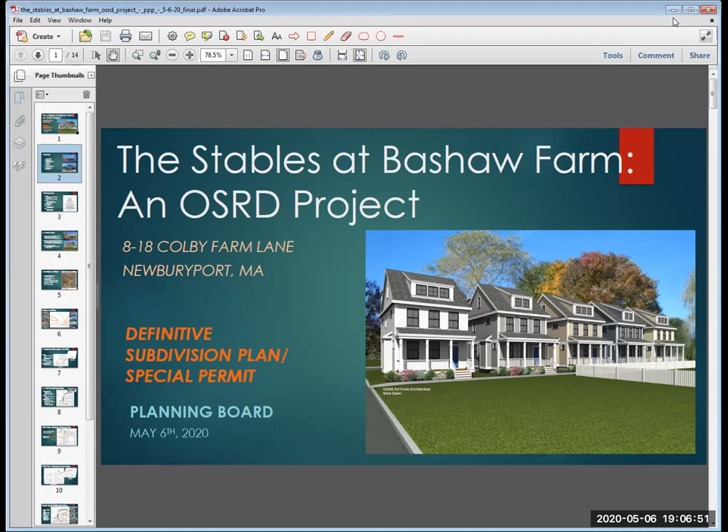So what we're going to do tonight is, I've just introduced the design team. I'm going to go over the project goals, our existing conditions, some of which you can see on the slide, our yield plan, the OSRD plan, the building elevations, and take questions and comments.

I might add that we had a very successful and in-depth technical review meeting with just about every involved city department a few weeks ago, which was really helpful. We've since met, figuratively speaking, with some other city department heads, namely Lise Reed, and we're working on meeting with the DPW, which has been a task given all the conditions. In addition, last night we had our first meeting with the Conservation Commission, which will lead to one of the comments we have later on. We pretty much closed everything out with them except for one remaining issue we'll talk about. So we're pretty excited, we've done a lot on the project.

So we can skip over this again, I've already talked about the design team.

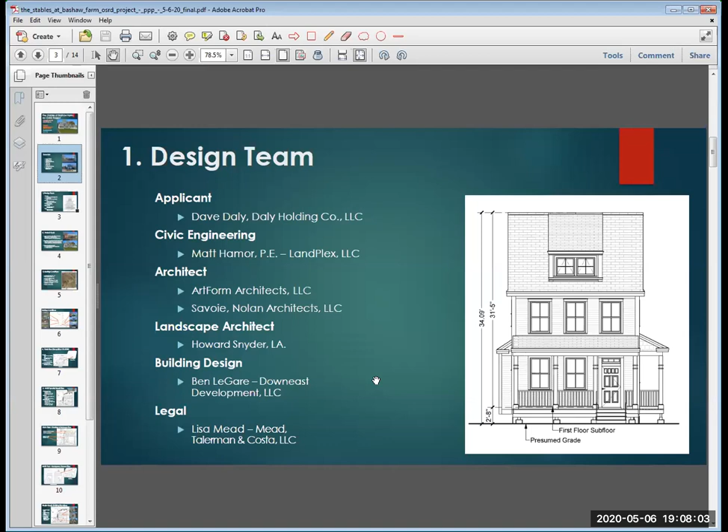The project goals are to support the revitalization of Colby Farm Lane. As you know, there's the Reserve at Bashaw Farm across the street, which is coming along nicely, with a number of units under agreement and it's really starting to be cleaned up. A lot of work has already been done at the end of Colby Farm Lane at Low Street to help with sight lines in either direction. Now we're trying to work on this side of Colby Farm Lane, which we refer to as Colby Farm Lane 2, which currently houses a number of industrial uses, truck storage, and other barns, not really conforming with the residential uses of the underlying district.

We also want to expand public open space in the northern pasture, preserving over 80% of the land in the project for protected open space, and provide some public parking and a neighborhood pocket park. And then expand housing opportunities. These are 8 modest-sized single-family homes and townhouse units, and one of the duplex units will be an affordable housing unit, which actually has a bedroom on the first floor, which the Affordable Housing Trust is pretty excited about.

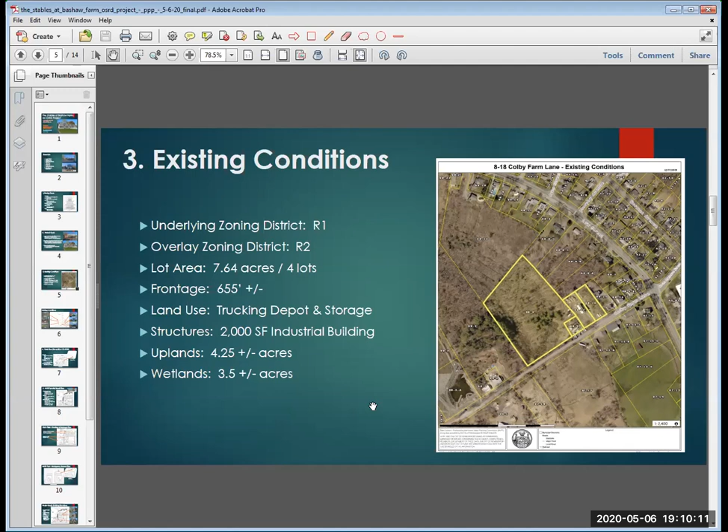So the underlying district is an R1 district. It has an overlay zoning district, the R2 dimensional and use requirements, which is how we get the 2-family use in there. The lot area in total is 7.64 acres; 80%, more than 80% of that, is 6.11 acres, and we're preserving that, which will end up being in that larger area we'll delineate further. There's 655 feet of frontage, including 4 lots in total. The current land use is a truck depot and storage area with a 2,000 square foot industrial building. There's 4.25 acres of uplands and 3.5 acres of wetlands.

Under these existing conditions, we have a lot of really great conservation and natural resource areas, wet meadows, uplands, and wetlands all in that back pasture. You might recall when we first met with the board, there was a proposed trail and bridge over that initial wetlands coming in off the proposed development lot. The Conservation Commission does not want that to happen; they don't want people trampling through the wetlands in the back and would prefer to leave it as open conservation land. The other existing condition is the truck depot and the storage of trucks all around the site.

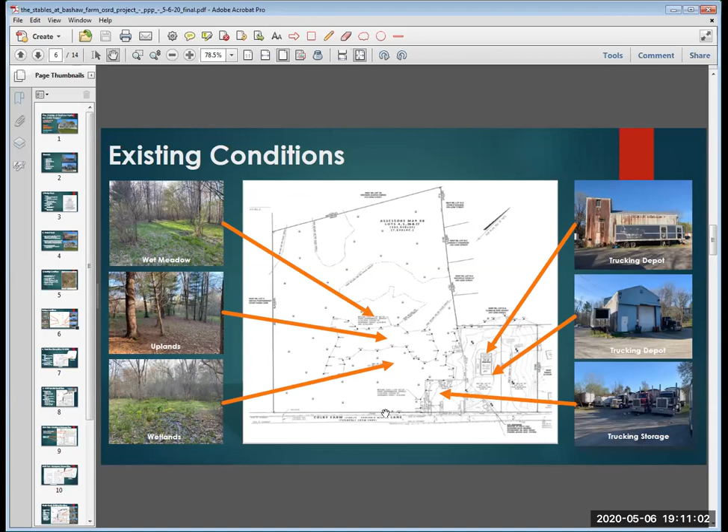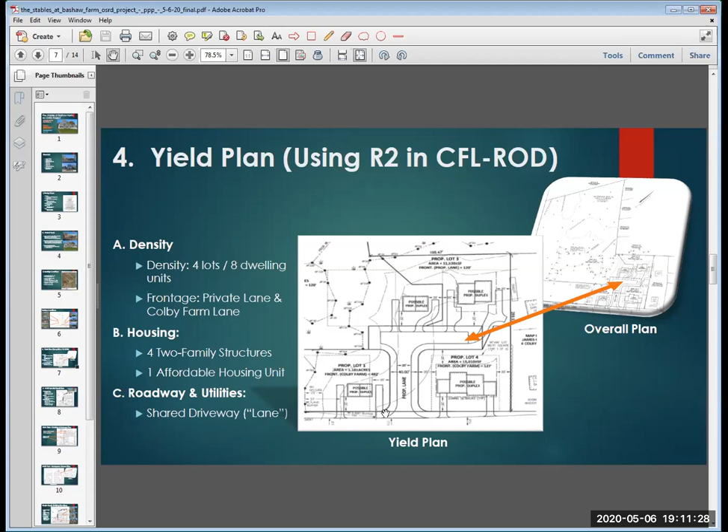So we presented a yield plan at our preliminary meeting with the board. The density allows 4 lots and 8 dwelling units. It has frontage on a private lane, Colby Farm Lane, so it meets your requirements for a lane, and the housing would be 4 two-family structures and 1 affordable housing unit. There would be a shared driveway and utilities, which Phil has reviewed. I'll take a little from Matt, and I shouldn't, but Phil has given us a clean letter, as has John Eric White.

So with the OSRD special permit plan, we have a single family house lot. We're going to show a picture of this later, which Matt's going to explain. It's going to get a little smaller at the request of the Conservation Commission, so we're going to need to ask for some waivers on the dimensional requirements on the lot, which we're permitted to do. We have 5 single family home structures at the rear of lot 2.

And then we have 1 two-family structure on lot 2. So all of the housing units on lot 2 will be a part of a condominium association, and the single family home will stand on its own.

Any deed restrictions that either the Conservation Commission or this board would request, relative to similar things requested across the street, namely notice requirements that there are municipal facilities at the end of the street, can be included in a deed restriction on the single family house lot. So that notice can still carry through.

The utilities, we have parking in the rear of the smaller cottage units and the single family house. And there's some guest parking that Matt's going to go through, and he's going to go through the drainage. And then we have a playground that's for the public at the front of lot 2, and 5 parking spaces, including a handicap space.

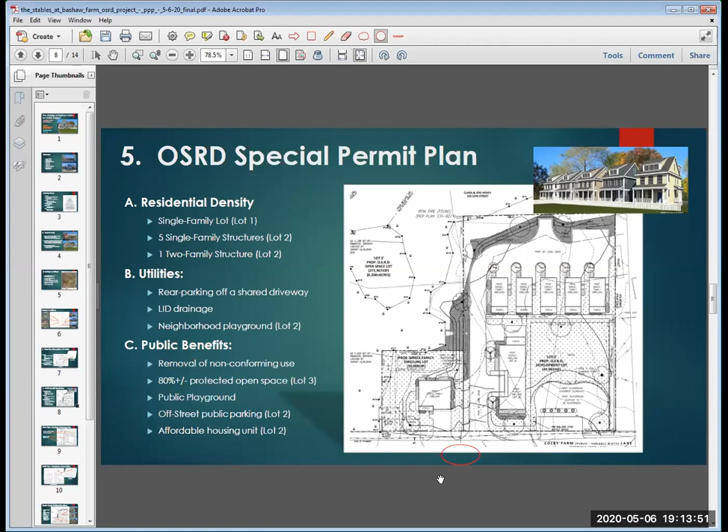I might also add, while Andy's shifting the plan here, some of the additional public improvements are going to be: we're going to be repaving Colby Farm Lane about 610 feet down from Low Street. We're going to improve the water service on Colby Farm Lane and upgrade the sewer service. And we're working with the Water and Sewer Department again on that, which we've had to cancel a bunch of meetings because of the pandemic situation.

So I'm going to turn this over to Matt.

Great. Thank you, Attorney Mead. Hello, for the record, my name is Matt Hamor. I'm with LandPlex Engineering and Surveying out of Lowell, Mass. And I'm going to walk you through the plan set.

If Andy could put the plan set up, we could walk through sheet by sheet on that. Hang on just one second. Yeah, no problem at all. That's okay, I was under the impression you were going through the rest of the slide.

I just didn't know if the board wanted me to walk through the development of the OSRD requirements through the subdivision plan.

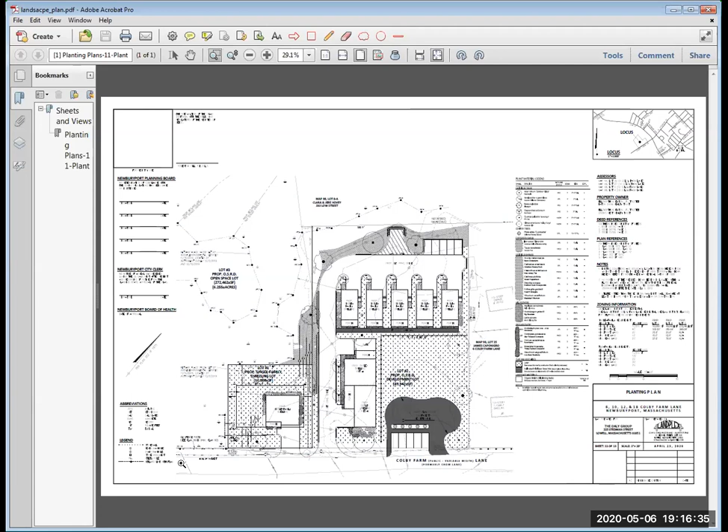Sure. So do all of the board members have the plan set in front of them? They, Andy just brought it up. So Andy, if you could, I guess, go to the plan of land, which is my sheet 4. That's great.

So the development's going to divide it up into 3 separate lots. One will be lot 1, which is this proposed single-family lot, which was going to be an ANR lot. And through the discussions last evening with the Conservation Commission, we're going to be showing you a reconfiguration of lot 1 in order to suffice some of the concerns with the Conservation Department relative to the westerly lot line and its proximity to the wetland line. And that lot currently on this plan had 10,000 square feet with a lot width of 100 feet, which was going to meet the minimum requirements for zoning for that to be a single family lot.

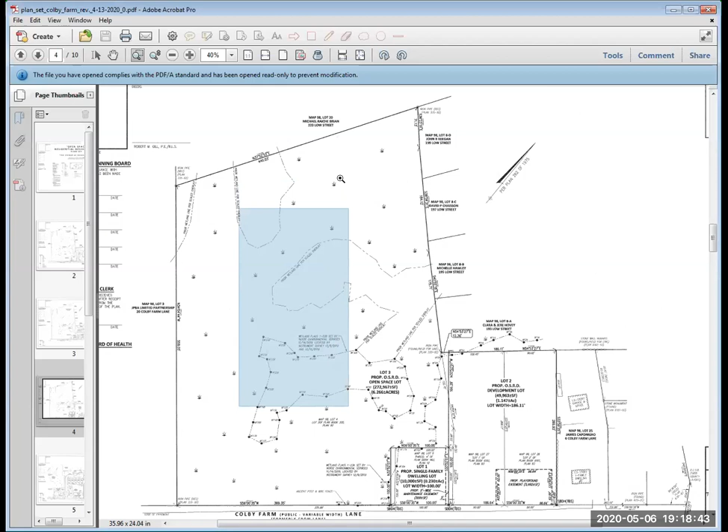And then there's lot 3, which is what we call the open space lot, which is 6.266 acres. So I just wanted to identify the 3 lots that will be subdivided, and after this public hearing process, we would come in and get endorsement for that plan. The next sheet is the layout and lighting plan.

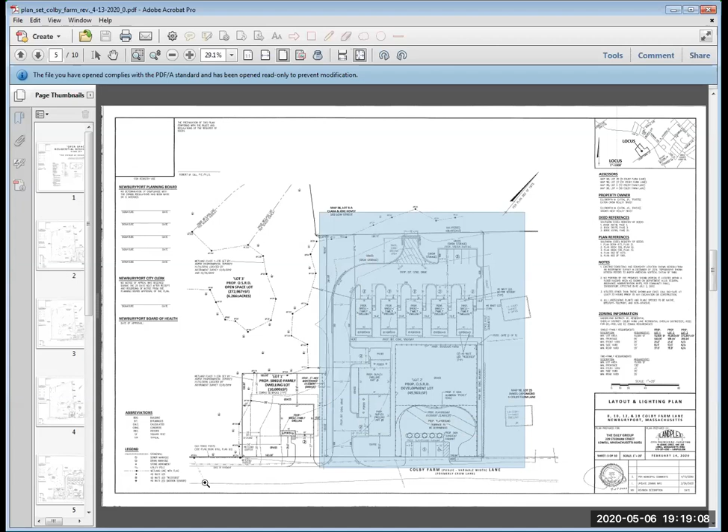We had a technical review meeting a few weeks ago, and we slightly widened the entrance drive from 20 feet to 22 feet to provide better access for vehicles coming and going off of Colby Farm Lane. So there's an access drive that comes in at 22 feet and narrows down to 20 feet.

There's a proposed duplex on the right-hand side with parking in front of each of the duplexes. It comes around to the rear to access 5 individual single-family dwellings, each with parking for each unit, as well as overflow parking for visitors, which is a 5-space parking area located in the rear of the property. There's also an emergency turnaround area specific to fire department, delivery vehicles, and trash pickup vehicles, plus a primary snow storage area in the rear of the lot.

There's going to be a sidewalk internal to the development, adjacent to the front of the single family units, as well as a sidewalk on the easterly side of the lot line that'll bring access down to Colby Farm Lane.

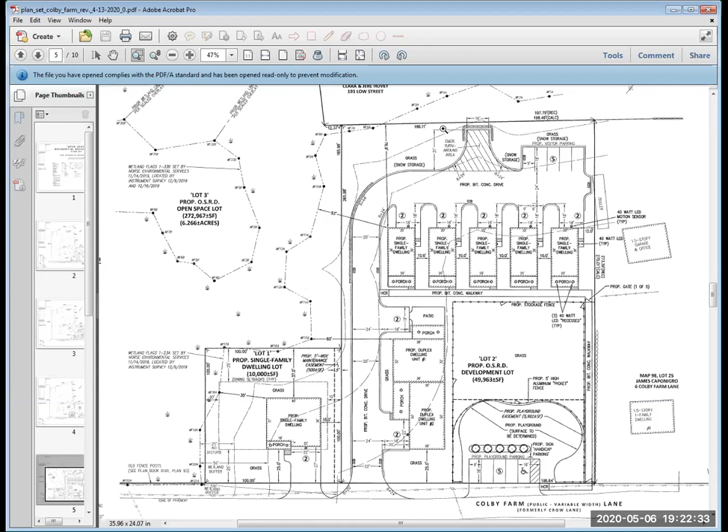So that's that sheet. Andy, if you could move to the next sheet, which will be the detailed grading and utilities plan. So this plan is pretty busy.

Essentially, there are 2 low points to the project for the drainage. Each drainage system will be mitigated with a catch basin to an oil water separator to an individual subsurface infiltration system with an emergency overflow that provides an outlet to a riprap apron for each of the 2 systems.

Additionally, the project will be serviced with municipal water. There'll be a water main that'll extend into the project, as well as the addition of 2 separate hydrants, which was specifically requested by the fire department.

Additionally, there'll be gas and underground utilities, and there'll be a sewer system servicing the project, which actually changed from the first submission, where we thought we were going to need to put in a pump station for the development. We realized that we could actually run the sewer system by gravity, essentially underneath the entire sidewalk system, which will bring the sewer back over to Colby Farm Lane.

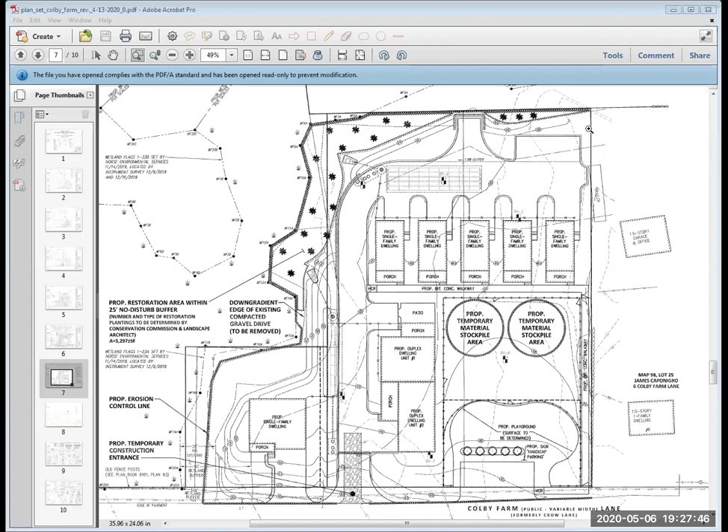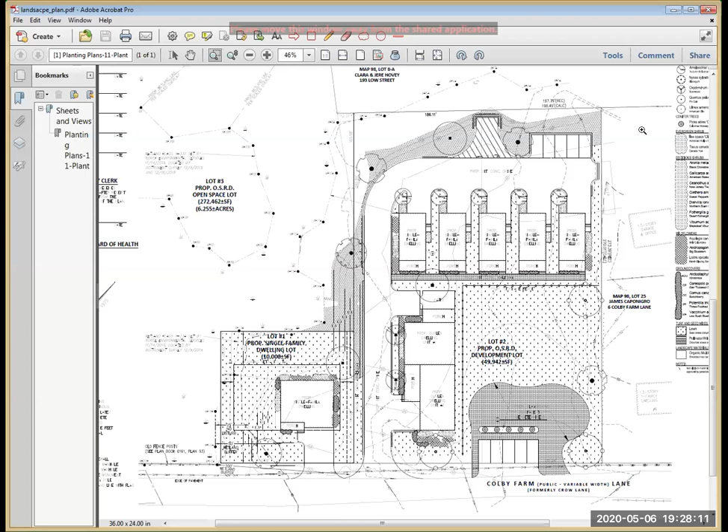Yes, this plan set is fine, but we're looking for the 428 landscape plan. It is on your website, and it was noted as something that would be presented tonight. This is, nope, that's not it—that's the 423 one. The difference is the shape of the duplex there. There you go, thank you.

Howard? Yes, thank you. Howard Snyder. I'm a registered landscape architect in the state of Massachusetts, and my involvement with this is to develop an environmentally sensitive planting plan, given the location of the development and the improvements being done.

In an overview of the plantings, the general concept is to use native plant materials appropriate to both the lowland wetland areas as well as the upland areas, and to balance that with plant material providing a visual identity similar to the development occurring on the other side of Colby Farm Lane.

So if we were to start from Colby Farm Lane and look at the trees planted along there, they're generally in keeping with the same species and location as the street trees on the other side.

As we transition into the site, looking at these trees, the idea is to locate trees more appropriate to open areas than typical shade or street trees. There's a higher density and these buildings are closer together, so locating shade trees that can be experienced not only underneath but from a distance is important.

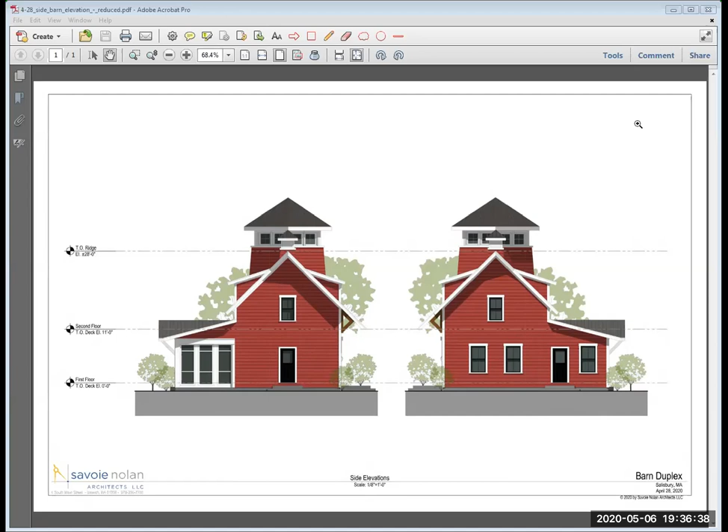We wanted it to be a barn, but not too much like a barn, keeping in mind what Leah McGavern had said at one of our earlier meetings. You can pull up the next elevation, Andy.

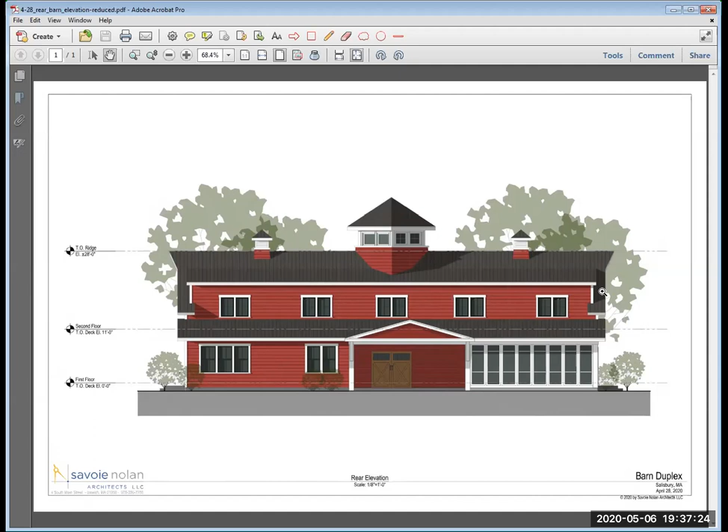I might add while Andy's doing this, whoops, that's all right, we'll go here and hopefully come to the front elevation of the barn. But on the barn elevation, the barn itself, the Affordable Housing Trust is pretty happy with it. They don't have very many first floor master units, and that will have a first floor master, so it gives them a lot of alternatives for people who may have some accessible issues to have that housing unit.

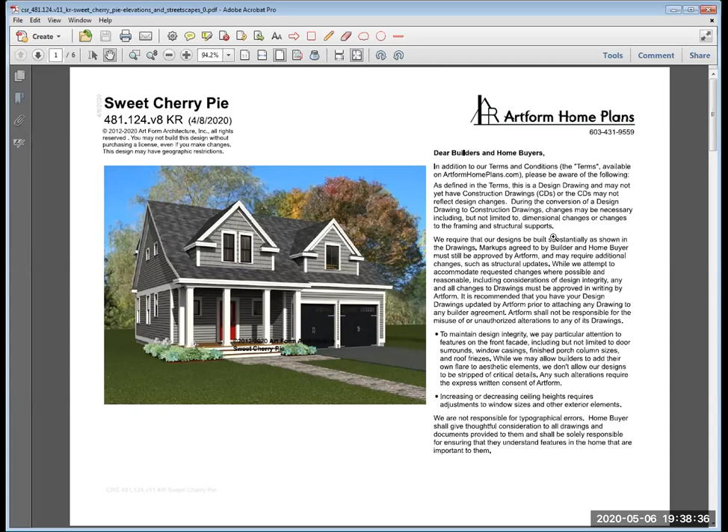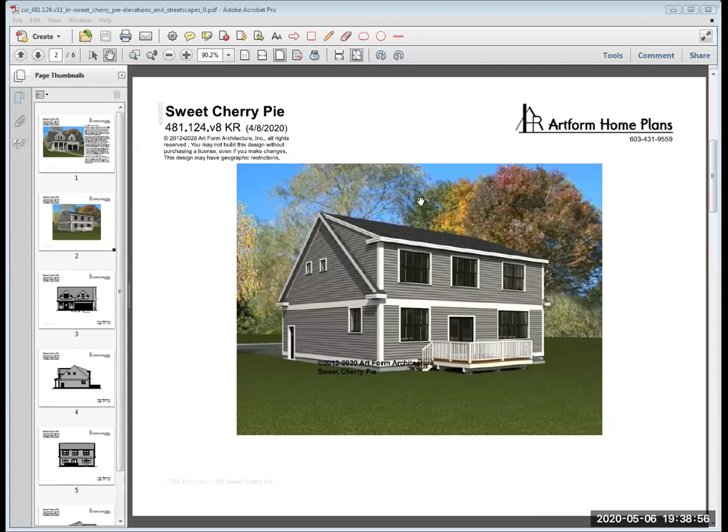Andy, I think this is probably more than one page, maybe if you scroll down. No, there we go. I'm sorry, just to let folks know, when I make a change of the page, there's sometimes a momentary delay, so I apologize for that. Okay, so there we go, there's the back and one of the sides to this unit. We don't need to go through all of them, but there's the front again in sketch.

So Andy, if you want to shift to the cottages, which should be up next. Yeah, just one second. Sure.

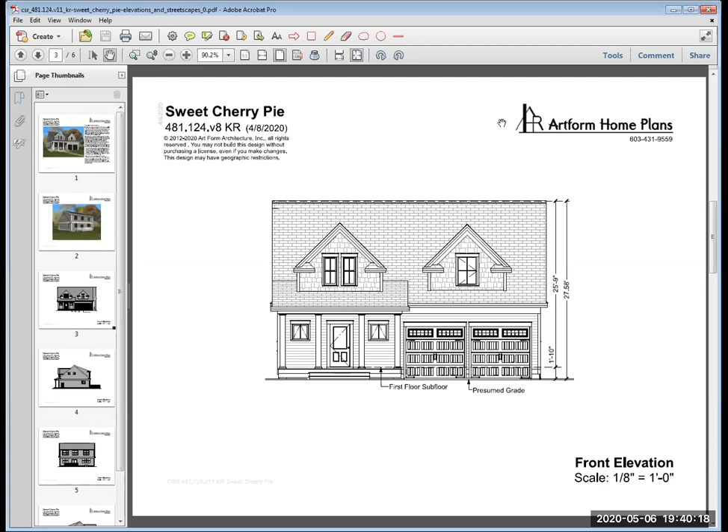So while Andy's pulling up the cottages, we want to say that the cottage style with the front porch, the idea is to encourage community in the neighborhood. It opens up onto that green space and then the playground in Colby Farm Lane, and hopefully provides a sense of togetherness. There'll be a various mix on the finishes of the exterior, some will be shingles and some will be clapboard, maybe some board and batten. We'll have a mixture of colors as well.

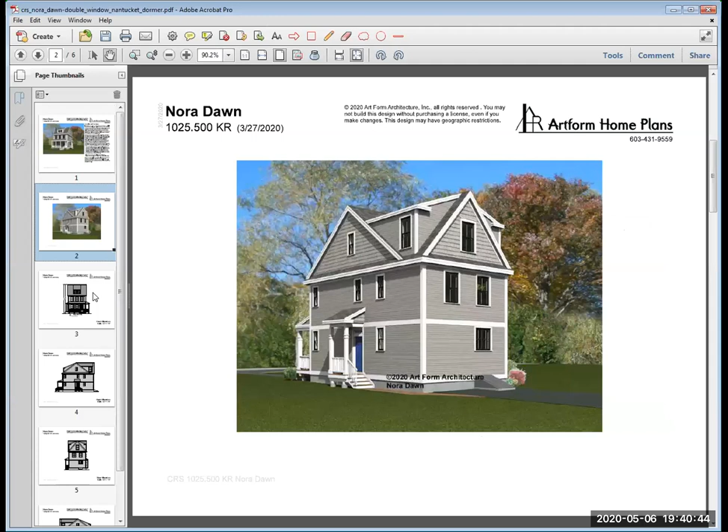Here we go. So Andy, you can scroll down on these. So this is one of the elevations that opens up onto the park, and you can see the side and the rear.

David, do you want to add anything about your design on these and what your thought was?

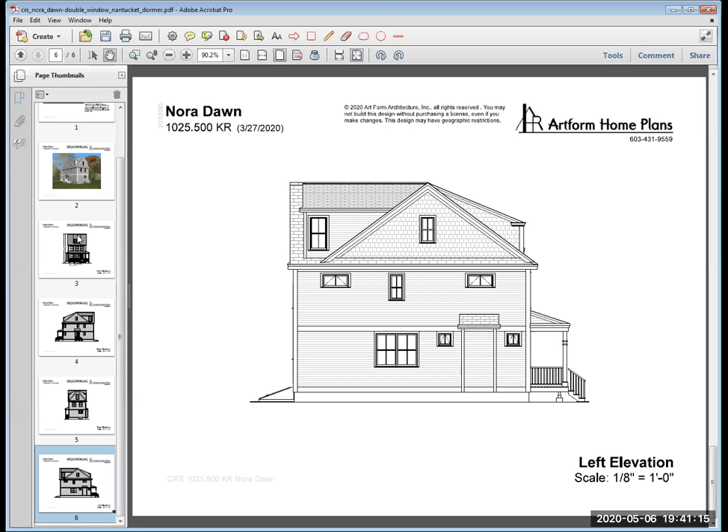We obviously had a challenge at the beginning, in our preliminary discussions with the board, of trying to make the duplexes individually distinct while also providing some character and aesthetic appeal. What we quickly discovered was let's get away from the duplex and try to make more of a cluster development here.

That's getting much more common. You see this in the South and some of these pocket neighborhoods up here in Massachusetts, but more so in the South, creating this community effect, clustering these houses together with their own distinct style. As you can see, we've incorporated some traditional aspects of Newburyport, New England charm here with the farmer's front porch and transom windows.

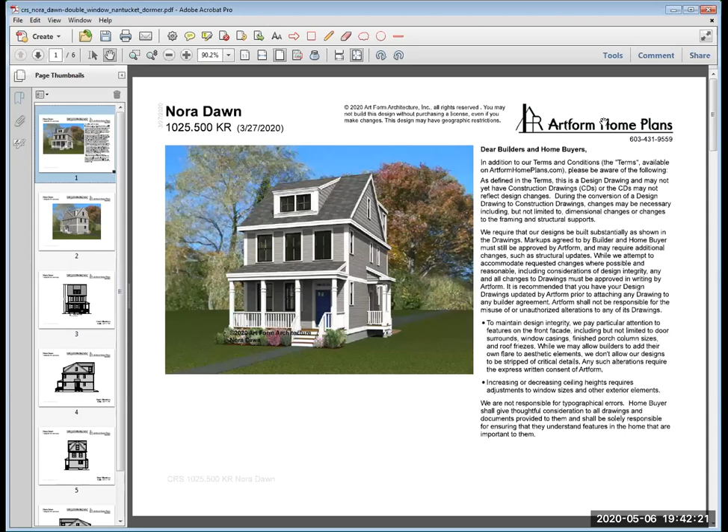We've also incorporated the Nantucket style, which is a piece of Newburyport's design regulations—a Nantucket style dormered roof. We have a double and then a triple dormer. As Lisa also weighed in, each one right now shows clapboard, but we're more than willing to add shake on some of the gable ends and some board and batten to dress these up.

There are 5 different colors—we'll get to a slide that shows the 5 unique colors we're choosing. They're all more traditional New England colors, but we're also trying to somewhat mimic the look across the street with some New England charm, while providing aesthetic appeal to this neighborhood and really promoting that community aspect of this development.

We talked a little bit about the barn—that's the anchor of the development. We didn't get to see the rear elevation, which is probably the best elevation you'll see as you come down Colby Farm Lane. This kind of harkens back to this area that was formerly across the street, and probably part of this at one point was a farm. That kind of anchors this project.

Tying in the other piece across the street, which is the newer progress across the street, with the smaller—well, bigger than—about a 2,200 square foot single family house. And in the back here, we have these 5 standalone clustered single family homes. They're all going to be 3 bedrooms, about 1,800 square feet.

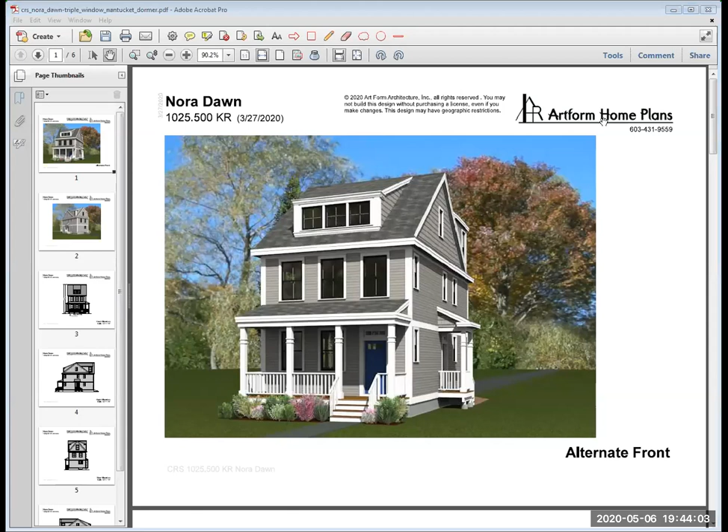We're proposing 2 to 3 different layouts, from a top floor master suite to a second floor master suite with a game room on the 3rd floor. We've been fortunate, and we'll bring this up in a couple of weeks with the board regarding our project across the street, that a lot of the units have already been sold out.

But what we found, no matter what we've done to try to quantify every design aspect, is that people still want to change floor plans. Through that process, we've understood some of the needs, wants, and desires of the people buying in this area. So we tried to tie them into the floor plans and aesthetic appeal of these homes that we've designed here across the street. We think it's very fitting of the neighborhood.

I can tell you I don't think you'll hear any neighbors object to this. If there are any neighbors or abutters on this call, there weren't any yesterday. They were really excited about getting rid of the trucking facility and incorporating this into the neighborhood, really making it a community neighborhood. They're excited about it, and we're excited about it too. These houses in themselves stand for what we're promoting here, and I think they provide some charm, some really good houses with livability and real appeal.

Thank you, David. All right, so Andy, if you want to shift back to the PowerPoint, we'll finish up with just a couple of final points.

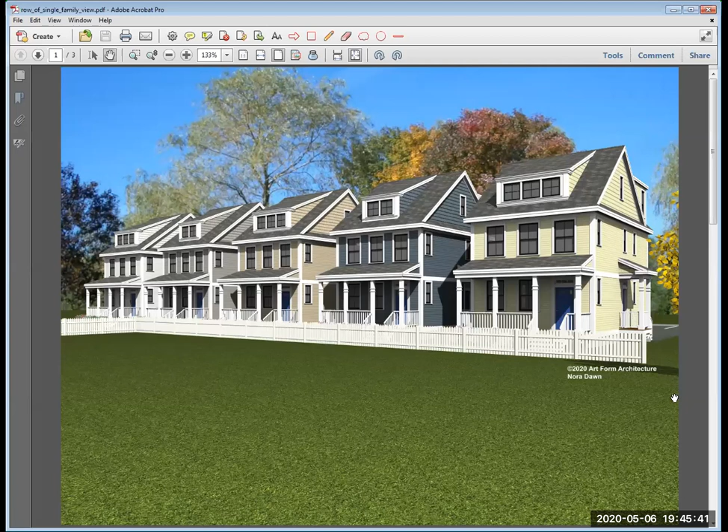Madam Chair, while he's doing that, I think we have put forth in our application the criteria and how we believe we meet the special permit criteria under 10H7 and under the OSRD criteria. We have met, as we've set forth in our presentation already, the criteria related to the OSRD. And then under the 6C special permit, we've met the criteria as well.

We showed the alternative development plan, namely the yield plan. We are offering to preserve open space, provide an affordable housing unit, and provide a playground, which of course is not a 6C requirement, but it's over and above any of the other requirements that exist in any of the zoning.

So this plan, I want to show that we have had this reviewed by the fire department, and the fire department has signed off on it. There was a late comment this last week from Phil. He had signed off on everything, and then he came back and there's a new NFPA requirement that a fire truck only have about 2 turns before they have to get back out, and this has 3. But the fire department signed off on it, so we believe we've met the criteria. You don't have a performance standard to that effect, and fire safety is met. So that's the emergency access plan.

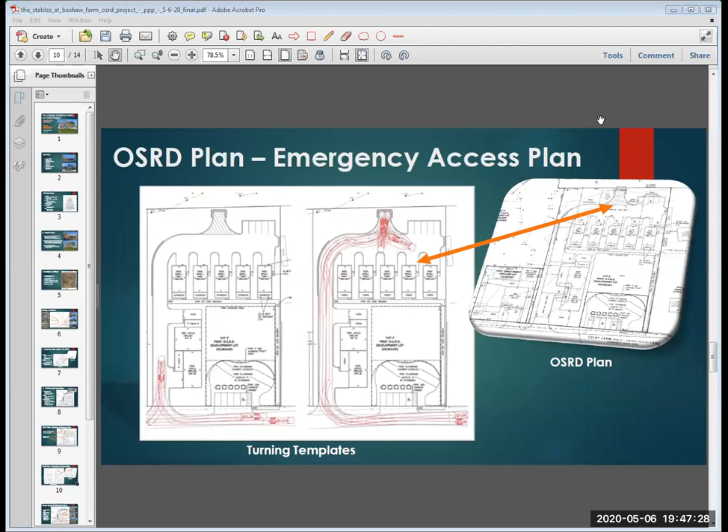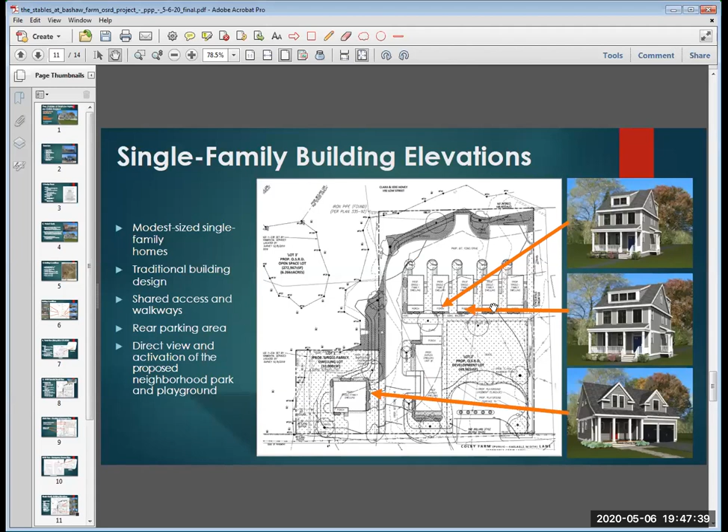So if you go to the next slide, please. And you can keep going because we're going to go all the way to the public benefits since we've now gone through that. We can hold right there.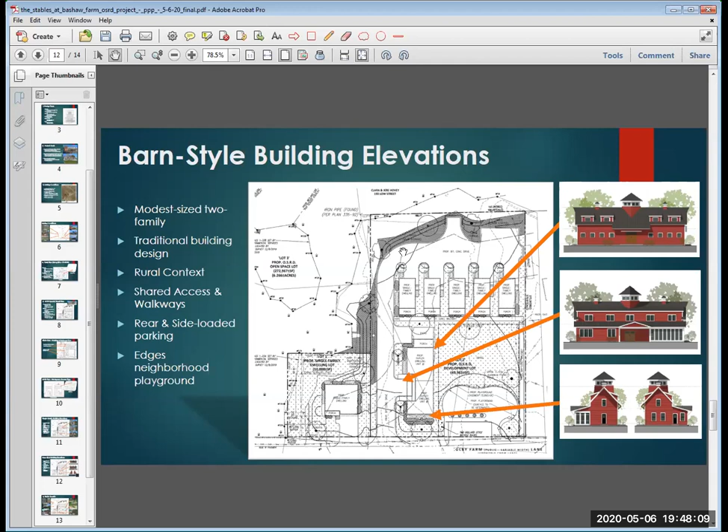So the public benefits: protected open space, the public parking spaces to provide public access. I might add that the Conservation Commission was actually pretty excited about the public parking spaces because they will also provide access for people to park, in addition to the ones provided on the opposite side of the street to the trail on Colby Farm.

Then we have the playground that will provide an easement to the city. The condominium association will take care of the maintenance of the playground. The green space in the rear of the playground, closest to the single family home cottage units, will be only for the condominium association, not open to the public. We'll have a bike rack down at the playground as well.

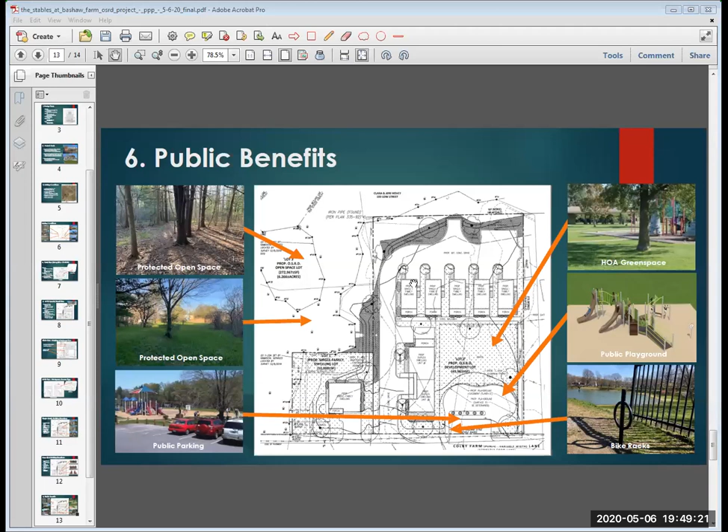And as I noted earlier, the improvements both inside and on top of Colby Farm Lane will be provided through the development of the subdivision. So I think that we've met all the criteria for all of the above, and we're happy to take any questions at this time.

Okay, are there any pressing questions from any of the board members before I open this for public comment, after which we will have an extensive discussion of everything we've heard? Is there anything you need to have clarified at this time?

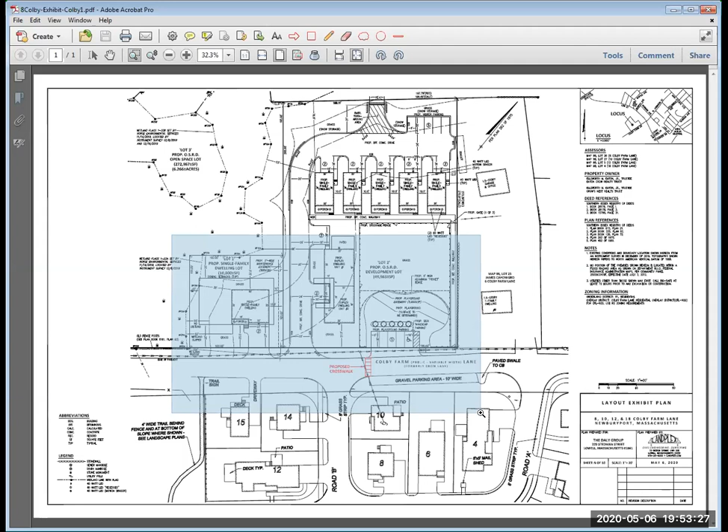You can see the proposed crosswalk, which goes right from the end of the gravel parking directly over to the entrance to the playground. So that's what we're talking about doing right now. The Concom likes that, obviously, because you can get down and then over to the trail at the left of this plan.

We're open to hear the comments from the planning board on this, but this seemed like the most logical location given the park director's comments. Comments from anybody on the planning board on that?

I actually do, this is MJ speaking. I'm kind of curious about the overall width of the road at Colby, at the new Colby Farm Lane. I always feel like people speed down this road, because there's only one destination, you don't usually have houses. Is there an ability to do raised crosswalks or something to slow people down, or is the overall width of the road being narrowed to help slow people down?

I'm going to let Matt answer some of that, but as you know MJ, there are houses on either side, and now we also have parking on either side, which will be a natural traffic calming measure. Both of those issues will be natural traffic calming measures. I think it would be up to the city whether you'd put any other kinds of traffic calming measures within the road, given that there are city trucks that go down to the compost and recycling area, and I don't think they're going to want them going over any kind of speed bumps.

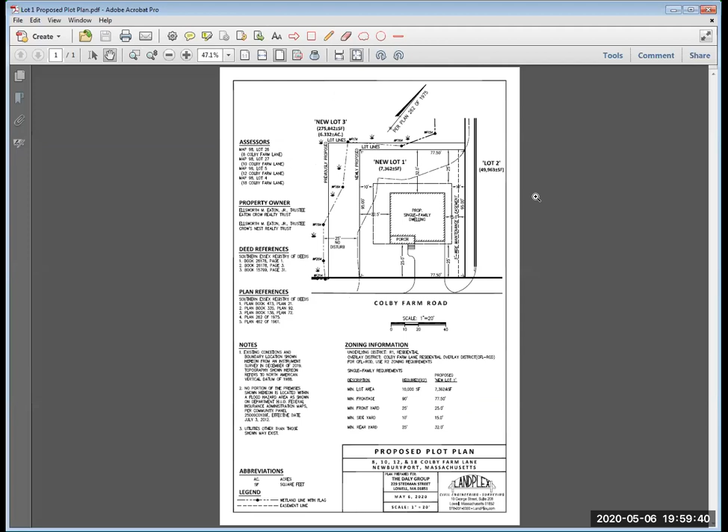Matt? Yeah, so sorry, the plan just changed. So Colby Farm, our proposed development does have a Cape Cod berm within it, and then it transitions to pavement, to the existing pavement in Colby Farm Lane.

So just to clarify, where does the grass end? To the right of that driveway is the area within the radius between the property line and what shows as, I'm not sure what that line means. What is that area there? Is that grass? That's grass, yep.

So looking at this, here's the reason I'm asking. It looks like the crosswalk is going to go from grass on the north side, entering a curb, and partially the curb and partially the gravel parking area on the south side. So do either of those qualify in any way for ADA accessibility? Well, that crosswalk was not intended, at this initial preliminary layout, to be an ADA compliant crosswalk to anything that would be connecting to ADA.

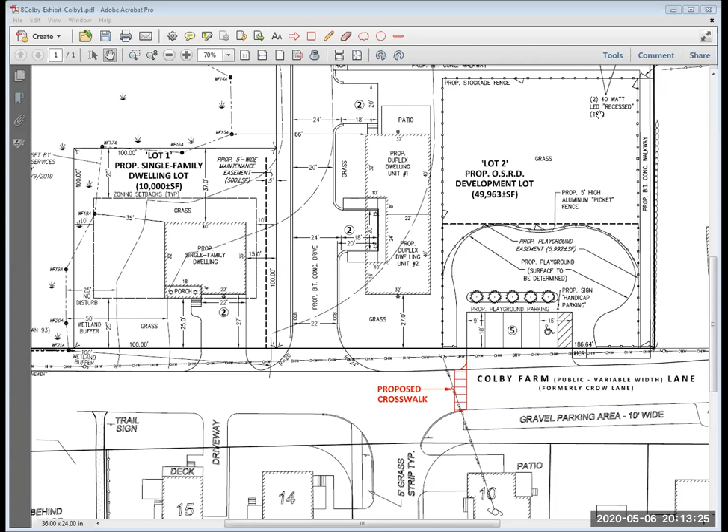Matt, you want to talk about that? Yes, hi, Matt Hammer here. I've been confused about that as well. So I can get back to Phil and John Eric to walk through what that issue is that they're speaking to. Okay, because I want to make sure the plans reflect what we agree to and what's going to get built. So I'll make a note that we'll hear from you on that the next time. Yes, thank you.

Now I'd like the board to just look through all the different special permit criteria that we have in the staff report. If you have any issues with any of those items, this would be your time to speak up. So it's sort of open-ended, but with some guidance as to what you might want to comment on or question at this point. Actually, Bonnie, before we get there, I do have a question about another part of the site plan.

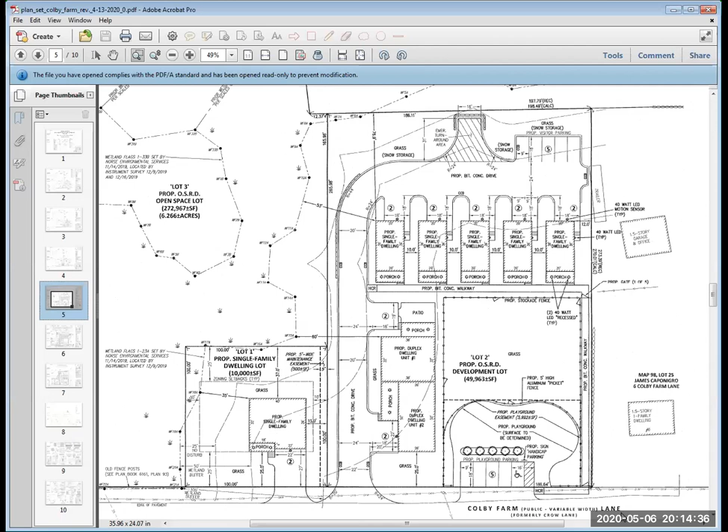This has to do with the fencing around the common open space and the playground. There's a general fence, identified as a proposed stockade fence. On the perspective view, it really shows more like a 3.5 to 4 foot picket fence than a stockade fence, but there's no dimension on the site plan itself. Is the intention really what's shown on the perspective view? If so, maybe that could be referenced in the plan and a detail provided in the plan set.

The second question is about the interface between the playground fence and the other fence. It seems to create some very difficult areas to maintain, with those little angles in the corners on the left and right sides. I was wondering what your thoughts were about that. And a more general question: why is there a need for a fence around the common area? It would seem to work more as a front lawn for the single family homes and the duplex if there weren't a fence there. So those are 3 questions relating to fencing.

Matt, I don't know if Matt or David... Actually, Rick, you bring up a really good point, because this has been a genesis of different ideas and concepts as we've progressed into this. As you bring that up, I see these two pockets on each end, thinking how are they going to mow those?

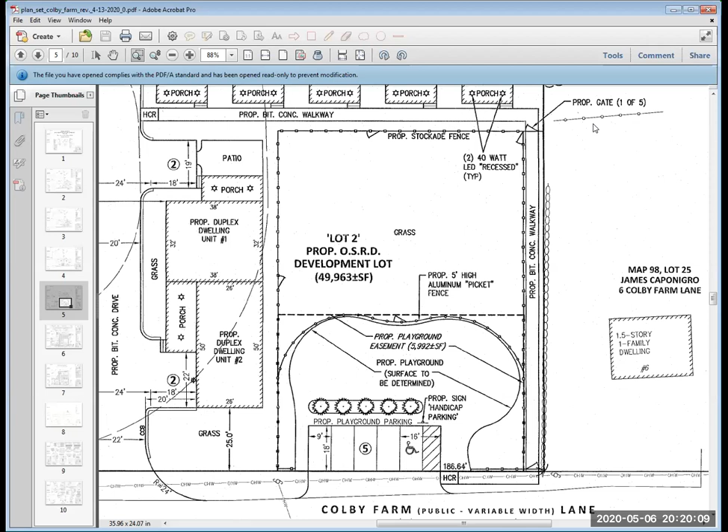Any other planning board members want to comment or question on any of this? This is Don, I'm happy to start off. I haven't seen anything yet from the Concom. Would someone mind repeating—did the Concom change? What did they change? And my specific question is, did they change anything that will cause you to go back and revise the site plan?

So thanks, Don. Yes, and this is it right here. So after last night's meeting—while we were at last night's meeting, with the great technology we had—there was, this originally was lot 1, which is 10,000 square feet on the set of plans that you have. But you'll see there's a 25-foot no-disturb line, and the Conservation Commission wanted us to make the lot line where that 25-foot no-disturb line is, and then take it straight back.

And over, because they would prefer not to have the homeowner own the wetlands and the no-disturb area, and mark it with a fence. Because we're reclaiming this lot in the 25-foot no-disturb area, they were fine with the way the no-disturb line remainder goes through that lot. They didn't have an issue with that. In fact, this line is the line that the commission drew last night. So this is the site plan change from the Conservation Commission on lot 1.

Okay, thank you. Continuing for a moment on the Concom—did I understand you correctly that their initial thought was not to allow a bridge into the open area, the uplands area? Yes, so if you go back to one of the site plans, Andy, that shows the larger area.

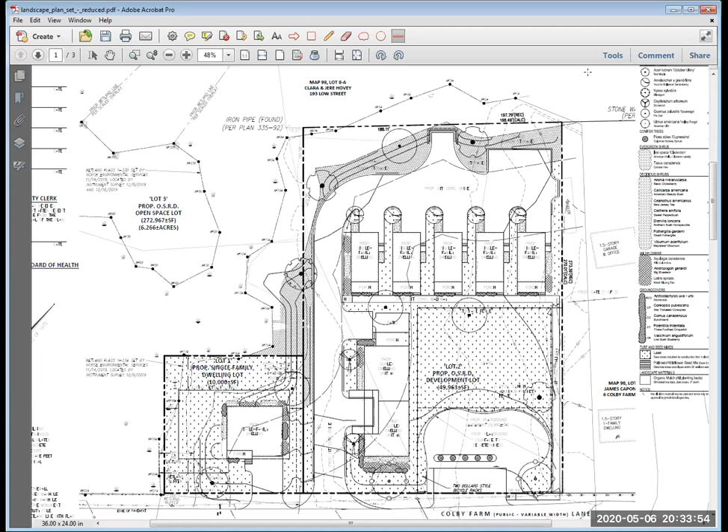I did take great notes, and a couple people on our team have been doing the same. I would ask just one thing - I want to get a read from the board to make sure you're okay with the proposed change to Lot 1, so we can actually engineer that into the plan and create a proper waiver request from the board under the OSRD requirements.

Does anyone have any issues with that? And this is, just to reinforce, this is based on the discussions you had with the Conservation Commission, correct? That's correct. And just to clarify, so the Conservation Commission was okay with the remainder of the 25-foot no disturb being in there? Yeah, we literally drew the lines on the plan last night.

This is Andy for the Office of Planning and Development. I participated in that meeting last night, and this is what was discussed, so the office doesn't object to it, especially since it's a request that really came from the commission. Anybody else? Okay, go ahead. Hi, Matt Hammer, Lamplex.

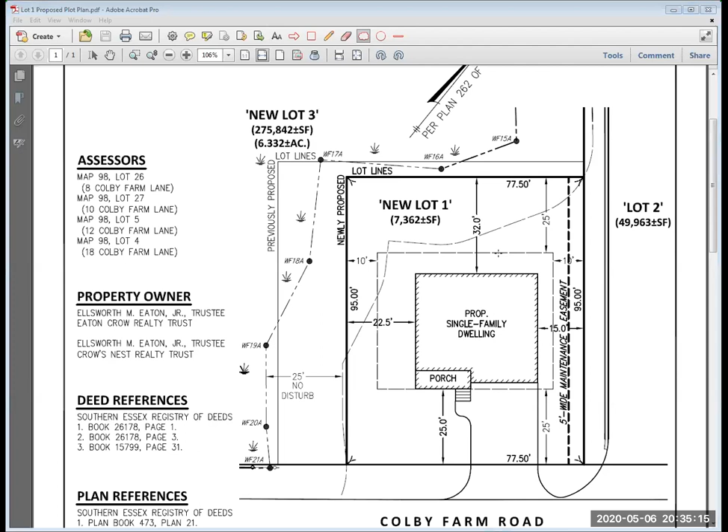I can talk to the swale comment that came up. Sorry for not having that answer readily available for you. So the shoulder of Colby Farm has what would be a gutter line swale that's typical along most sheet flow roadways that do not have sidewalks and vertical granite curbing. So on the plan, we simply note to maintain a swale along the edge of the pavement.

And that was recognized by Phil Christensen, but also reiterated through John Eric White's comment where he says that a grass swale will be installed. Lastly, it's important that this section of the road get improved. So what essentially is happening there is that along the shoulder of Colby Farm Lane, that work will be under the jurisdiction and the advice of DPW and engineering as to what would happen in that section of the roadway.

So this is still unresolved. Is that what you're telling me? It's resolved in the way that our plans can only address what's happening in Colby Farm Lane as they exist today. But there's going to be some improvements to Colby Farm Lane moving forward, and that particular issue will be addressed at that time, which is what John Eric White's saying.

This is very disturbing in the sense that I think we have the problem along some other streets. I think it's Hale. You may not be familiar with that, but there was a project for, I believe, a nursing home of some sort, and it's all backed up. It's overgrown, right at the side of the road. It's another road that needs improvement that never happened or hasn't happened yet. I don't want to see this devolve into 'it hasn't happened yet' and so we all have to deal with overflow and bad drainage.

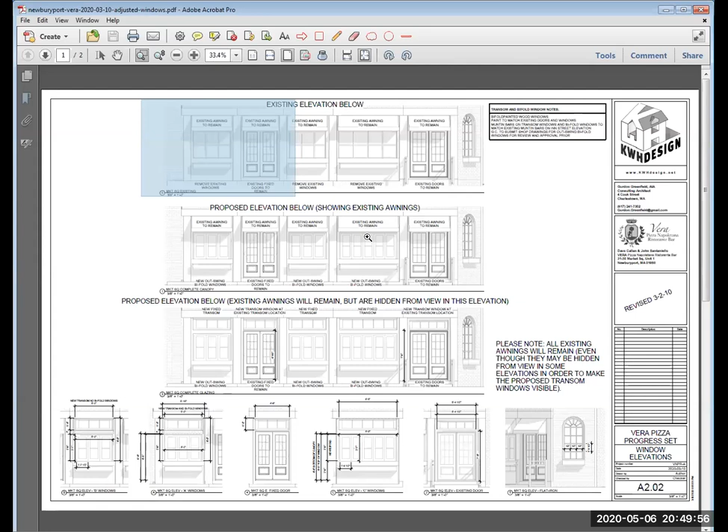Andy, any chance that drawing is handy? Yep, just take a second to pull it up. Here you go. See, this is where we last left off with these drawings, what we were proposing before the metal windows came into play.

Leah, do you see what it is you wanted? I mainly wanted to bring it up and have everybody look at it, because to me it just looks so different. Yes, I agree. This was the last incarnation from the historic board — we gave them this because this is what they asked for, you know, 1 over 1. Before that, it was a little more divisions, closer to what the doors look like.

And you see the window to the right with the curved top? We were trying to make windows that look similar to those, so they all matched, you know. I remember. But as we kept going on each meeting, the window amounts were getting less and less and less, and then finally they said, we like it just the way it is, we want to keep it the same.

To keep it the same, it's much more costly to do, but especially if you try to do it in metal, it's just — we couldn't do it, we wouldn't be able to afford it. But in wood it could be done, but again you have to make it a little bit thicker, just slightly thicker.

We can give you detail on that, but I want to get a sense from the board first. Is this what you really want? What you want to see on Market Square? It's the centerpiece of the town. We're trying to do something tasteful. We're trying to give a feeling of openness and a more inviting feeling for when people are on the square, in the nice weather, spring and summer. I think it would be nice if they could open, but again, we need some type of guidance.

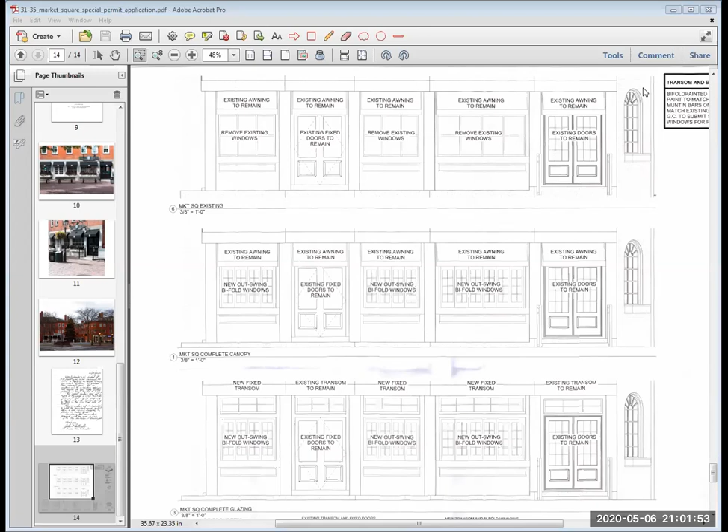Can I make one more point? This is MJ again, sorry. I just looked up an image of the Port Tavern, which has the operable windows, and they're quite a bit longer. I didn't look at Saya's, but they have enough of a wood frame that they have somewhat of a historical look, kind of character to them. I just wanted to bring that up, I think they're very successful actually, and I think it does enliven the street front, just like we're talking about we want to do. So I'm kind of agreeing with Leah, and I just think there's a way to do it without being quaint and cutesy.

MJ, can you clarify the Port Tavern windows? There are no divisions at all in that pane? Agreed, yeah, it's the same with Saya. Yeah, I'm thinking about that because that is sort of the commercial look that got developed later in the 19th century than when these original ones would have gone in. You have to remember this was right after the fire in 1811 when these brick buildings were built, and so they would have tended to have smaller panes of glass, not necessarily the minute ones, but it's definitely a modern look to have the totally open pane of glass. And I'm not sure I'm there yet, I'd like to hear from others.

This is Rick, and I know nothing about this subject, but it seems to me one of the challenges is the more panels you have in these windows, the less glass results, because you need a frame for each panel, correct? When you look at the bay to the left of the door, that five panel bay, you end up with a lot of wood or metal framing the glass. Keeping a lot of glass and having fewer panels provides less busyness and more light, I guess.

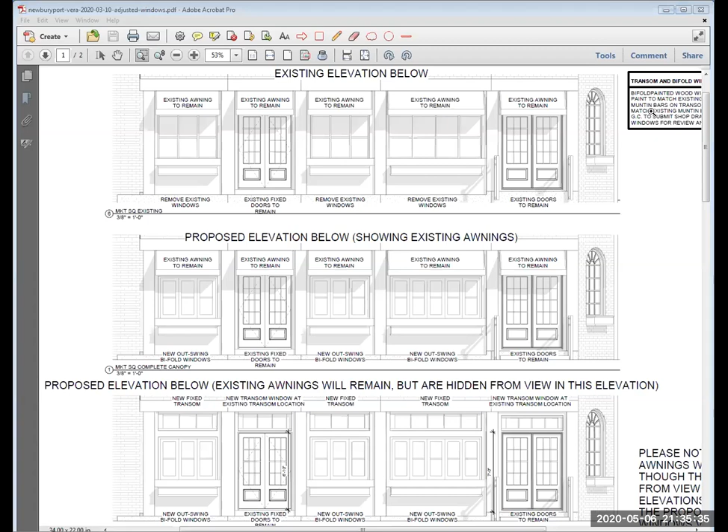All right, hang in there.

Oh, we've got a special permit, sorry - 6C, special permit for 342 Merrimack Street. There's been an informal meeting and we have the meeting minutes from that to remind us what we discussed, but for a more up-to-date presentation, I turn it over to Lisa Mead. Thank you, Madam Chair. Are we back on here? Yes. Excellent.

Lisa Mead, on behalf of the applicants, the Lynches at 342 Merrimack Street. Just a reminder for the board, just over a year and a half ago, we came to the board to talk about a 6C for this property.

The property currently contains a two-family residence on a lot of 13,315 square feet. The residence was originally constructed around 1785, with a number of modifications since then. It was constructed by Mr. Whitmore and is known as the Jacob Whitmore House. Historically, it was a single-family home until the late 80s. In addition to Mr. Whitmore, it was also purchased and occupied by John Currier of the Currier Shipyard in the 1820s, which was directly behind it and beyond Merrimack Court on the Merrimack River.

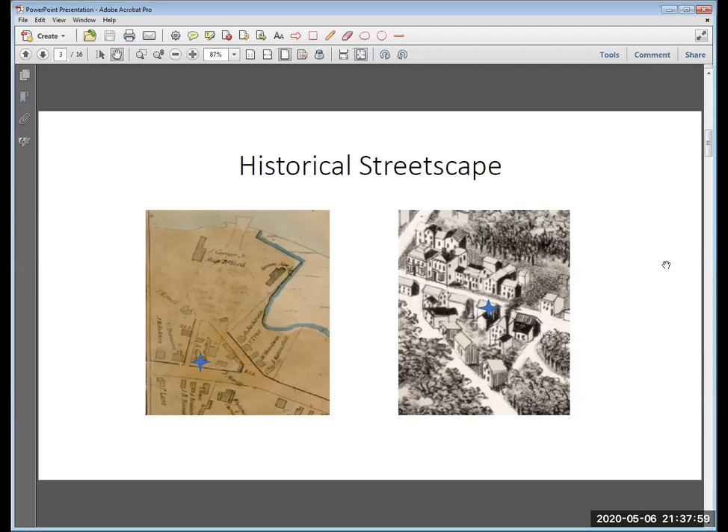You might recall that when we were here before, we showed you these two historic plans that showed the main house on Merrimack Street, and then a row of houses along Merrimack Court along the streetscape.

So the proposal is to restore the existing residence to its historically single-family home use, preserving the current two-family use on the property by constructing a second subordinate single-family home that faces Merrimack Court. We gave our initial presentation to both you and the Historic Commission, and Mass Historic has agreed to hold the preservation restriction as well.

Given the nature of the house, they also updated their Form B in accordance with their additional research, as well as that of Mr. Dre, which we had provided to you before.

One of the things the board had requested, I think it was Aaliyah, was that we push the house back into the lot to meet the setback. Leah had requested we bring it forward so we have more of a streetscape in the back. So we received a dimensional variance from the Zoning Board of Appeals in order to do that. That was actually recently extended because it was going to expire at the end of this month.

So we've spent the last few months working out the details of the design on the project. The architect on the project is David Curie, who I believe is with us tonight. David, I'm going to let you take them around the house and through your proposed renovations and restoration.

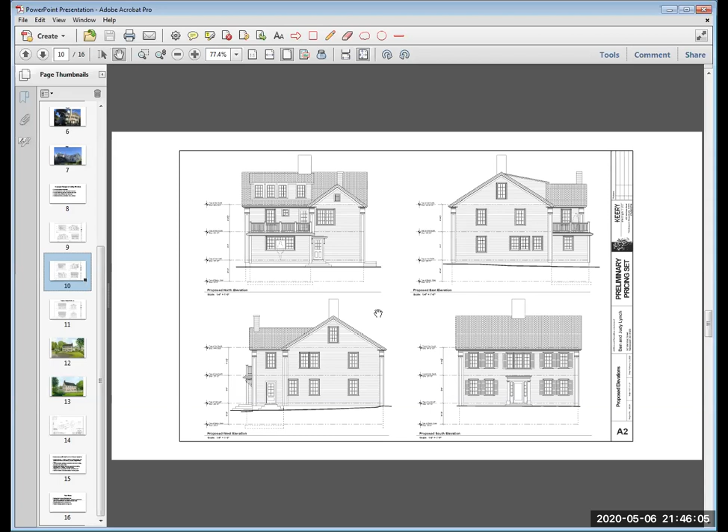Thank you, David. If you go to the next one, it's the proposed second residence in the rear. The board might remember seeing renderings of this, and David has now refined it into a drawing. So this is the rear structure. Merrimac Court sits 7 to 8 feet lower in elevation than the Merrimac Street side of the property. In addition, the footprint of this house is 10% less than the footprint of the existing structure at 342 Merrimac.

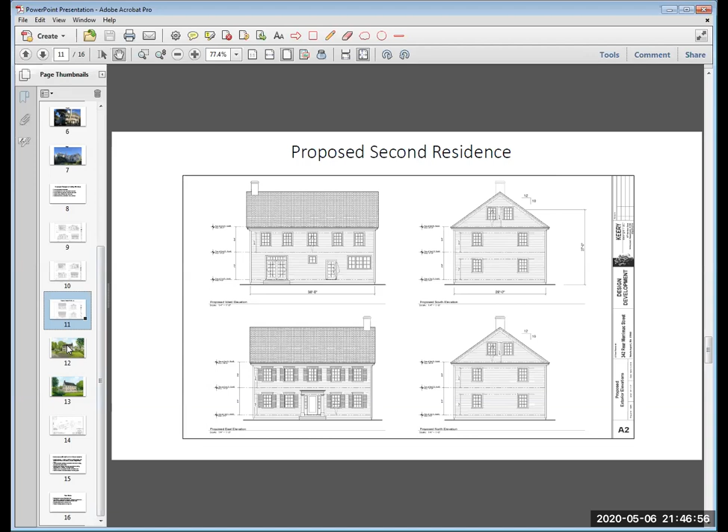David, do you want to talk a little about the materials you're going to use on the renovation and restoration of the historic house? Going back to the historic house, in keeping with Dan's love of old things and woodworking, he is going to keep, I think, the majority of those clapboards - he thinks they're in fine shape - and wherever they're rotted, he will replace in kind with exactly the same clapboard. I believe they're pine, not cedar. And he's in the business, so he can find those nicer materials. So the materials will basically be the same.

The shingles, the asphalt shingles, will stay the same for the roof, but the trim on the rear will more than likely be wood, even on the rear side. I had mentioned you could go with things other than mahogany, or you could go with AZEK or something like that, but on the rear piece, I believe he will keep the wood throughout, even on the new corner boards toward the rear.

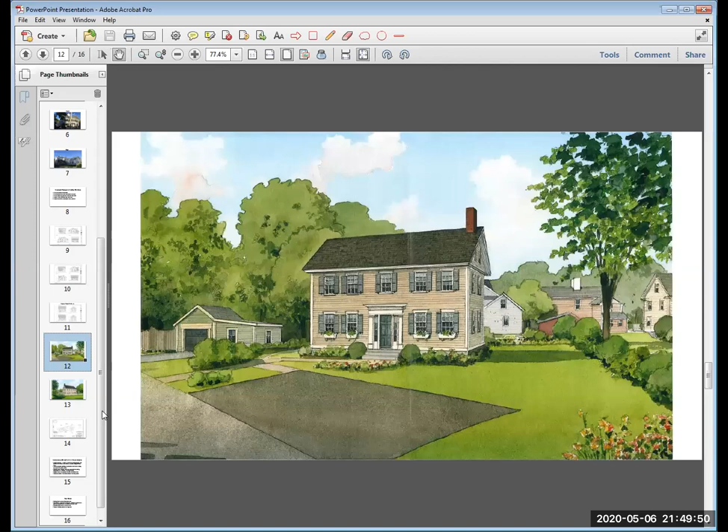So in the next slide, Andy, we've talked about the compliance with the 6C requirements. The by-right development would be to do an addition on the rear of the house and add an accessory structure, a standalone accessory structure facing Merrimac Court, which they could do, not necessarily want to do, but that would be the by-right development.

We proposed granting the preservation restriction. Both the board said that they would be in favor of holding it. The Historic Commission was in favor of it and in favor of restoring this house. Mass Historic has been in favor of it as well. So that would be the public benefit.

The proposed second structure would be subordinate to the main structure on the property. There's adequate access for the proposed structure on Merrimac Court, which is a public street, and we've obtained our dimensional variance from the Zoning Board of Appeals. In the application we've included all the requirements in compliance with the 10H7 criteria, the typical special permit criteria.

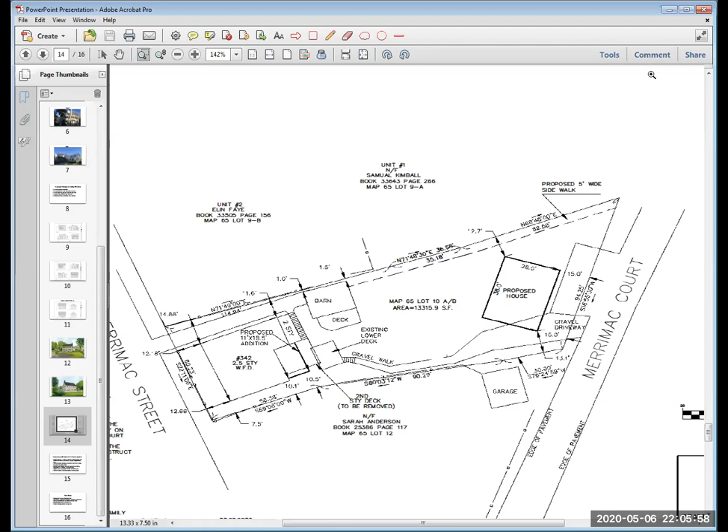Okay, I'll take a motion to continue this hearing to June 3rd, please. So moved, thank you. Second? I'll second that, it's Leah. Okay, and I need a roll call on that. James?

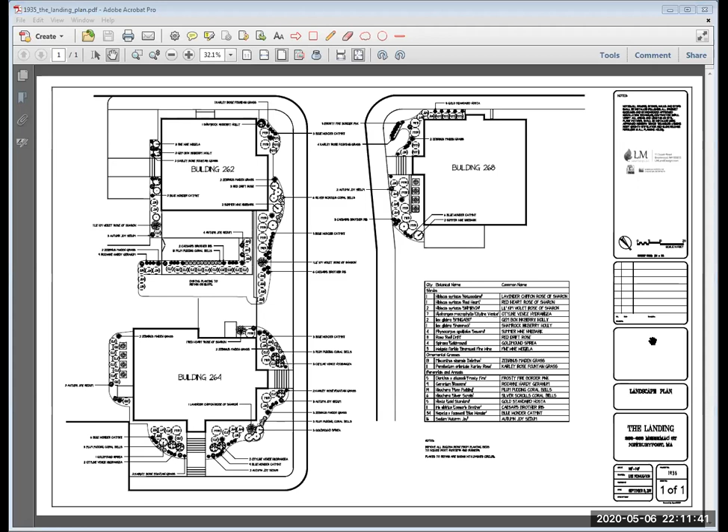We appreciate it, Cameron. Thank you. I appreciate coming to see us too. Thanks. Okay.

First ANR of the evening, 2 East Boylston Street and 138 State Street. All 3 ANRs come from Attorney Mead, so we'll turn it over to you, Lisa.

Sure. Thank you, Madam Chair. On behalf of the owners of 2 East Boylston and one of the units at 138 State Street, the applicants are taking a portion of the rear yard of 138 State Street and carving it off, making it a new lot area for the East Boylston Street property. The East Boylston Street property was totally conforming and they just wanted a bigger yard. The zoning board has granted the variances necessary for the State Street property, so it's gotten its prior approval, and that's pretty much it.

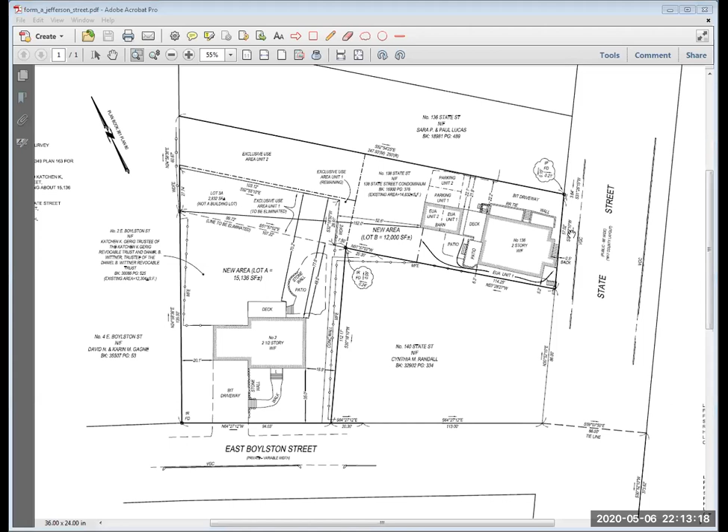Beth? Yes. Anne? Yes. Leah? Yes. Rick? Yes. MJ? Yes. Don? Yes. And I'm yes as well. So that's approved.

You're welcome. Next ANR is 332 Merrimac Street and 7 Savory Street.

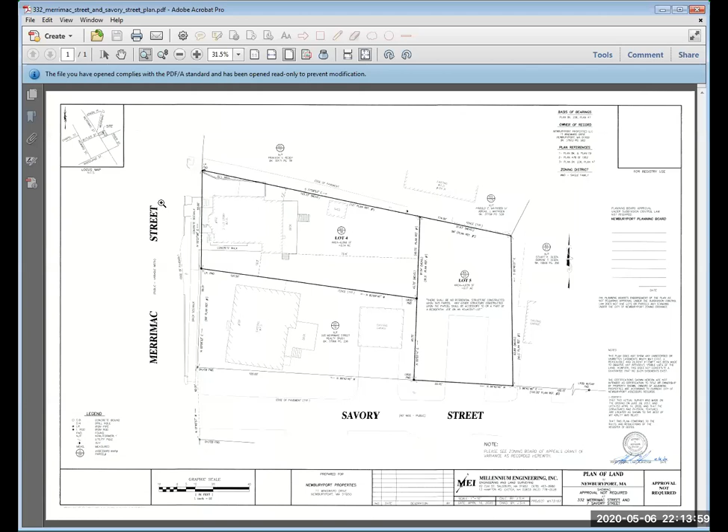And yet this application says on it that it was an application for a non-buildable lot. Was that how it came in, and then the variance made this condition on it? Yes. Okay.

Any other questions? Yeah, I want to pursue that. So the application does say it conforms, it is an approval not required plan, or does not require approval because one of the lots is designated as a non-buildable lot. So was there a variance for lot 5? Yeah, I thought the variance was for lot 4. So because the lots had merged and they were technically one, the variance controlled, so the zoning board had control over the whole thing. And they granted the variance necessary for the setbacks and the frontage on lot 4, but said they would only do that if lot 5 had a restriction that a residential structure could not be constructed upon it, but that only an accessory structure could.

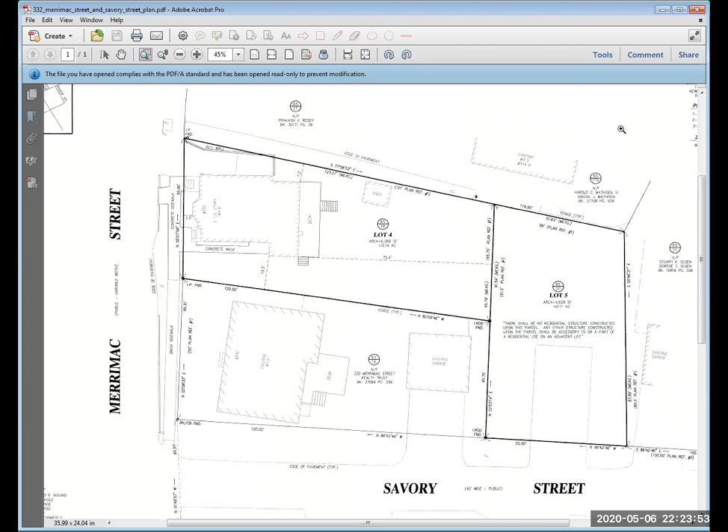Okay, looks pretty straightforward. Any comments? I'll take a motion to approve this A&R.

Motion to endorse, so moved. Yeah, Don, so moved. Okay, second please. MJ's second. Okay.

Roll call, James? Yes. Beth? Yes. Anne? Yes. Leah? Yes. Rick? Yes. MJ, yes. Don, yes. And I say yes as well. So that one is endorsed.

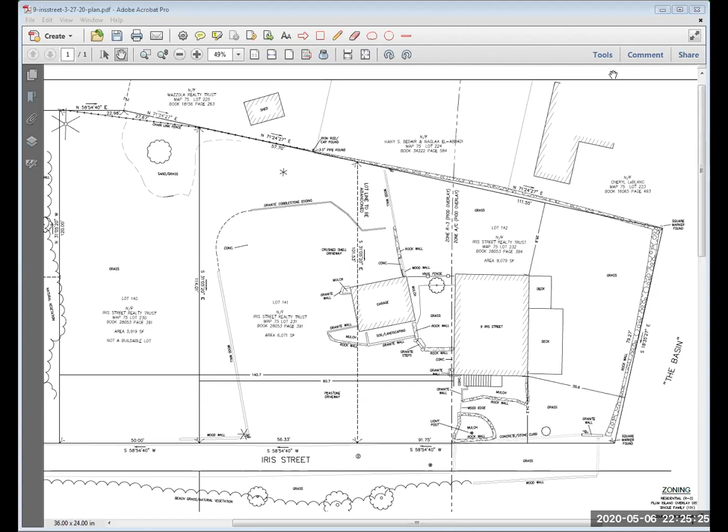Thank you, thank you. It's been lovely to spend the evening with all of you. Oh, thank you for hanging in there. We appreciate it. All right, take care. Okay, good night, be well.

All right, we'll go right to the minutes of April 15th. Do I have a motion to approve? Motion to approve. Rick? Second? I'll second, Don. Thank you.

Discussion, there are just minor edits that I've submitted to Linda, and I believe there was something else in there, but it was all minor. Okay, I've removed the public hearing from the heading. Okay, good, on Caitlin's recommendation.

Okay, so they're in order as amended, minutes as amended. We'll take a roll call. James? I wasn't at that meeting, so I'll abstain. Okay, thank you. Beth? Yes. Anne? Yes. Leah? Yes. I think you weren't at that meeting. That's our last meeting. Were you here then? No, I don't think you were. Okay, so you have to abstain. Rick? Yes. MJ? Yes. Don? Yes. And I'm yes.